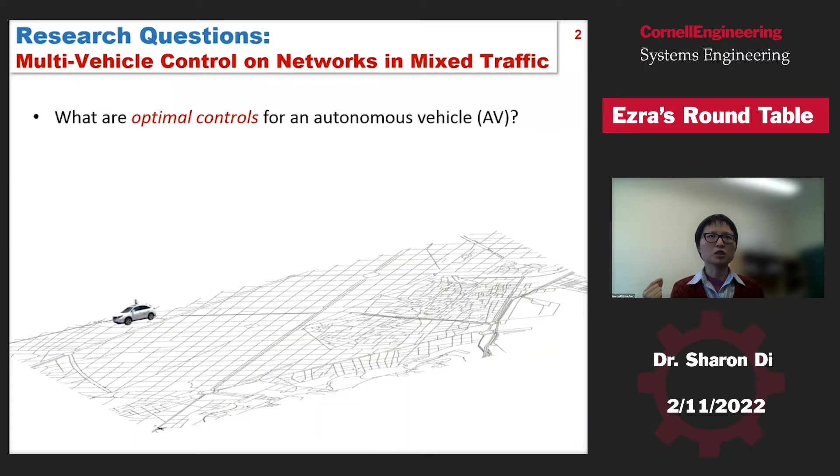What we really want to consider first is what's the optimal control problem we should formulate for the autonomous vehicles. When they are running on a road network, they first need to determine their speed choice when they move along a road link or segment. But at the intersection or junction point, they also need to determine which route they want to take, or what's their turning ratio.

However, if there are a lot more autonomous vehicles on the roads and they interact with each other, then not only does one optimize its own objective function while others are also doing so simultaneously, this forms a game. So how do we solve this game, and derive some equilibrium-based and optimal control policies?

The last question we are interested in answering is, how do we infer human behavior when they interact with the autonomous vehicles? In this talk, I will introduce how we leverage game theory, in particular Mean Field Game and control, and also machine learning, in particular physics-informed deep learning, to solve this problem.

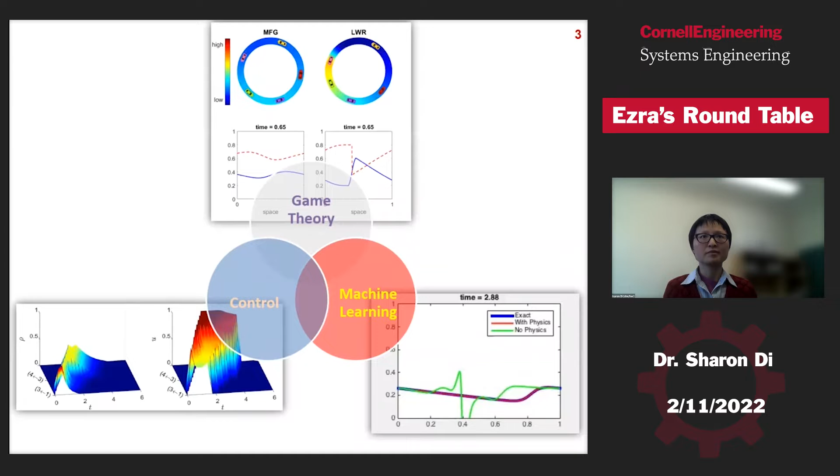Before I delve into methodology, let me show you a video clip, basically recorded by a driver inside his car. This is a Waymo car trying to merge onto the highway main line. You can see its left turning blinker is on, and all the other human drivers in the neighborhood of this car were able to successfully merge onto the mainline. However, this car failed to do so and had to get off the highway at the next off-ramp.

So from the human behavior perspective, this doesn't make any sense. I think there are many reasons this happened, and one reason is probably that nowadays autonomous vehicles are controlled using more control-based methods, or what I call a control agent.

However, people realize in both academia and industry that we really need to model them as AI agents. What do I mean by artificial intelligence here? It's that we need to treat each autonomous vehicle as a rational agent or game player. Their goal is to optimize some utility function, and then they either play a cooperative or non-cooperative game. They need to develop this capability of learning and adapting to the emerging traffic environment.

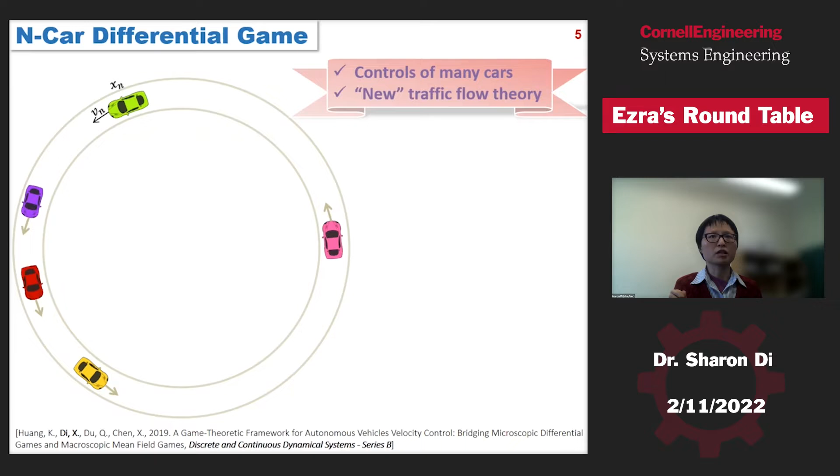Their goal, basically, when we apply this differential game and then approximate to mean field game, the methodology is scalable, which means we can use this equilibrium to control many vehicles simultaneously. We also found the connection between this game theory and what we call a new type of traffic flow theory, so I will describe how we apply this method.

We assume every car here has an objective function called J, and this J is composed of two parts. The first, Fn, we call the cost function, it's time dependent, so it can include any terms describing the car's running cost, congestion, safety, or emission. You can add whatever terms you want your car to consider while optimizing its driving policy.

And this V is the terminal cost. Basically, at the end of the driving horizon, denoted as big T, what cost do we want this car to achieve.

Our interest is a Nash equilibrium of the velocity control for car N. The definition of this equilibrium is that when other cars fix their control strategies at V minus N, this car, when it adopts this equilibrium control Vn star, will have a minimized objective.

So for the differential game, this is the setup, and I think you can basically treat it as a coupled system of optimal control. Each car is solving its own optimal control problem, everyone, but they interact with each other, so one's action may influence others. This game becomes not scalable when the number of cars grows in the system.

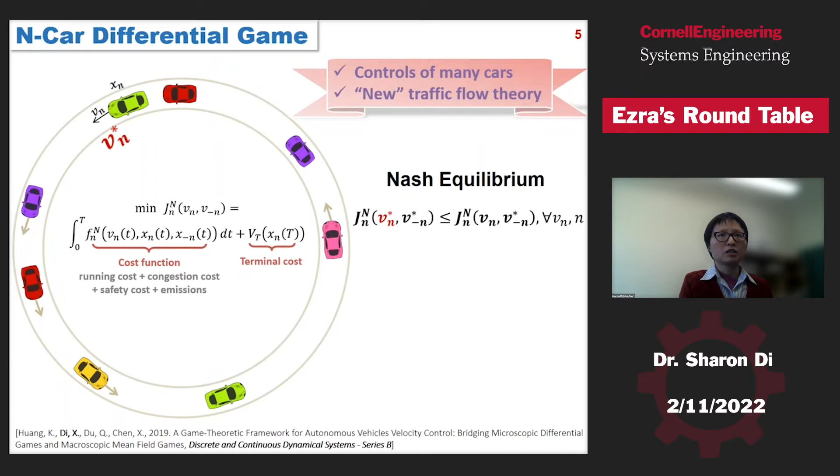So what we do is we introduce the so-called mean field game. What is a mean field game? This concept was proposed by two groups of people back in 2006 and 2007 independently, and this game aims to solve a decision-making process for multi-agent dynamic systems.

In the dynamic system, every agent plays a so-called non-cooperative Nash game. However, because the number of agents is large, this mean field approximation can be applied to go to the so-called n-player limit. When we let the number of agents go to infinity, the game moves from the differential game to mean field game.

Since its inception, this game has demonstrated its robustness in explaining social phenomena, including Mexican wave and fish schooling. The reason is because it can bridge the microscopic agent-level optimal control problem to the macroscopic mass-level dynamic system. I will skip the details about mean field game, but let me talk about how we apply this mean field approximation to the differential game we set up at the beginning.

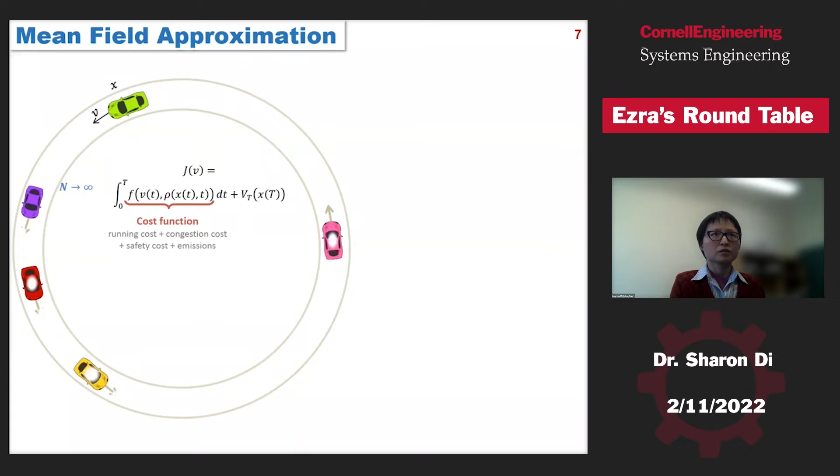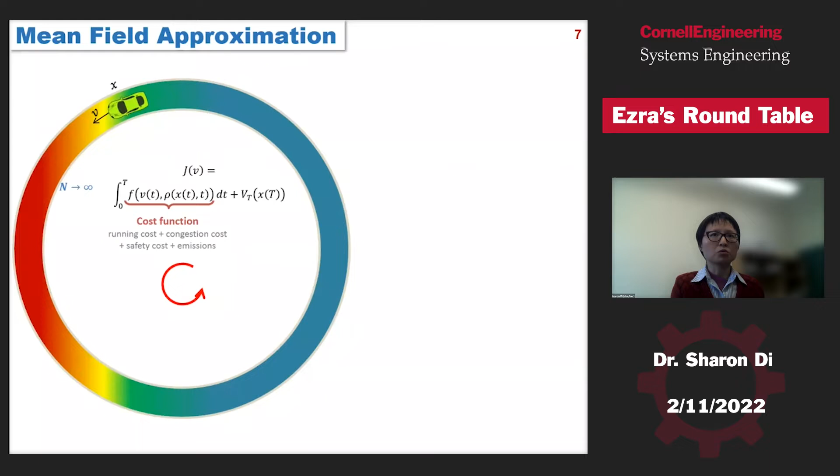Once we have this approximation, this generic car doesn't see the discrete cars in its neighborhood. Instead, it can only perceive the traffic density in its neighborhood. We use this heat map to represent the traffic density, basically the spatial distribution of cars.

And instead of solving a Nash equilibrium, now we are trying to solve the so-called mean field equilibrium. It consists of two dynamic fields: U, which we call the traffic velocity field, and rho, the traffic density field.

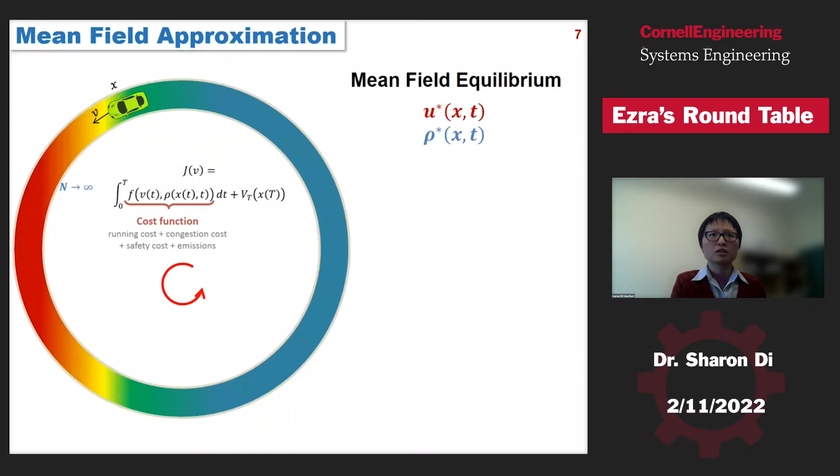How do we solve this mean field equilibrium? We use so-called forward-backward equations. Let's start from the agent dynamic.

Each car in the traffic stream tries to react to all the neighboring traffic environment and solve an individual optimal control problem. Once we apply this mean field equilibrium, this generic car solves a generic optimal control problem. V is the speed of this generic car, and J is the objective function.

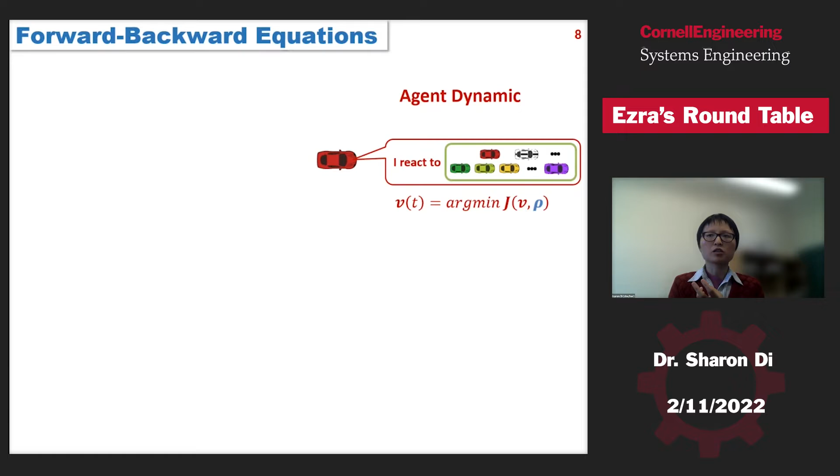When we solve this objective function, we assume rho, which is the traffic density, is known. Given rho, we can solve this optimal control problem, and then we can feed back the U, which is the velocity field, back to the so-called mass dynamic.

Mass dynamic describes how the traffic population moves. Here we use the flow conservation equation. In this flow conservation equation, we assume U is known, and we try to solve the traffic density rho. Then this goes back and forth until it converges, then an equilibrium can be obtained.

We call this agent dynamic a HJB equation solved backwards. And the mass dynamic is the FPK equation, solved forward.

If I write out what this HJB equation looks like, it consists of two equations. V is the optimal cost, we need to solve it, and rho is the traffic density.

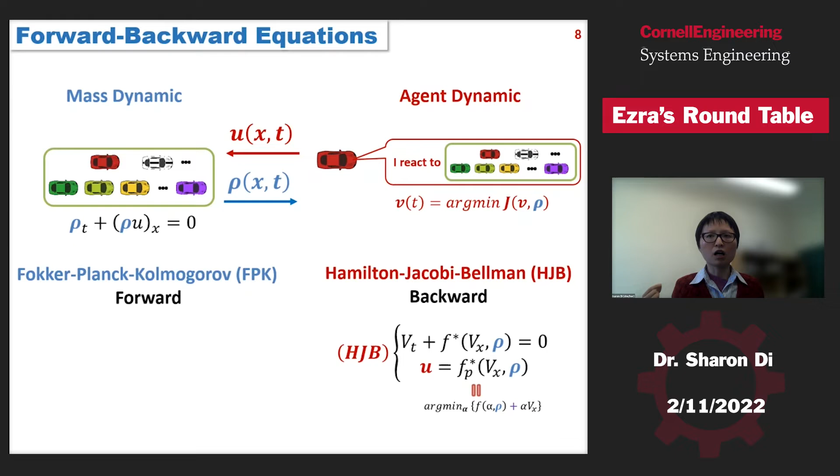F is a common mathematical transformation. I indicate what it's like here. And the FPK equation is just the flow conservation.

Here I want to mention that the mean field game we focus on the deterministic system. Usually, when this game is applied to other fields, the FPK equation also has those viscosity terms and also stochasticity terms.

The reason we assume it's constant, which means the right-hand side is 0, is because traffic cannot appear or disappear all of a sudden. So we assume flow is exactly conserved.

How do we solve this system? There are three categories of methods. The first is variational form, but to use this we need to assume this game is a potential game, so the cost function we focus on can be decomposed. Basically, the traffic density rho and the traffic velocity u can be separated. But in our case, it's not separable, and I will explain why in the next slide.

Then fixed point iteration, it's quite straightforward. If we can solve the forward and backward equations iteratively, eventually it can converge. But we found out that in our case, when t is very large, basically the planning horizon is long enough, this method also failed to converge.

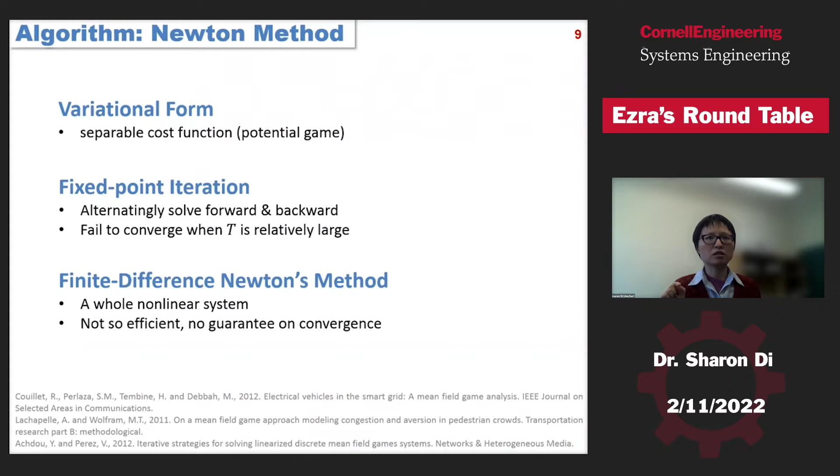So we adopt the third method, the finite difference Newton's method. Basically, we put the forward and backward equations into one big system, discretize it in time and space, and solve the big equation.

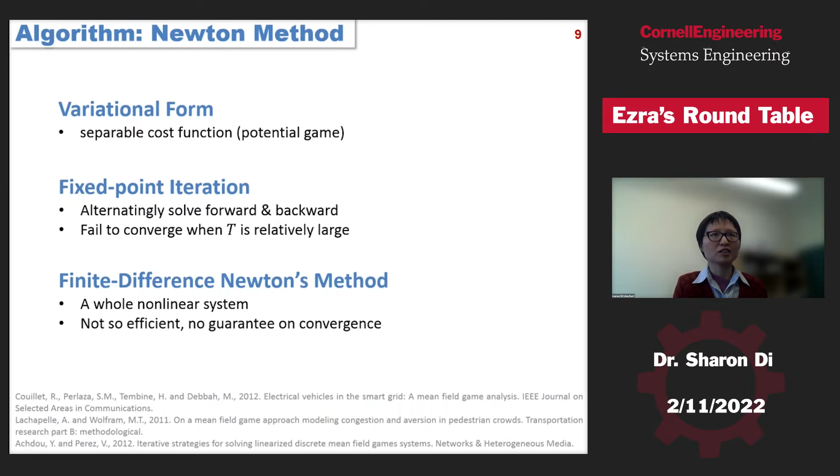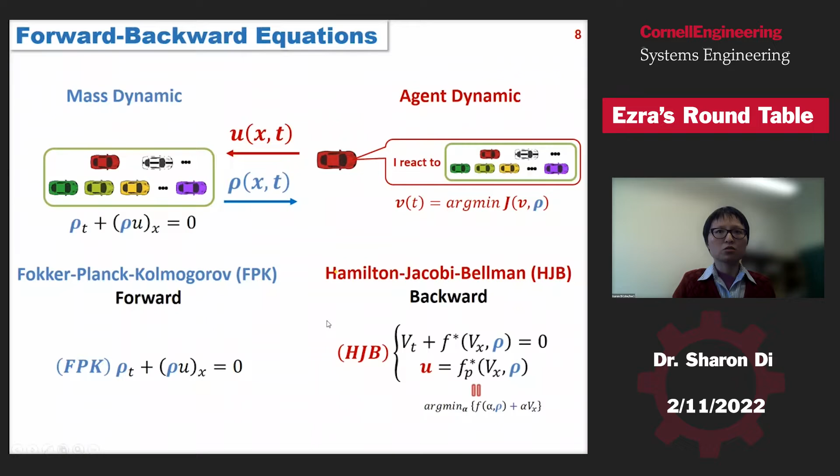Thank you for the question. I try to introduce some traffic background, so if you have questions about what the terms mean in the traffic background, feel free to jump in. I can elaborate more.

Now we demonstrate how the Mean Field game works on a ring road, and now we want to look at a transportation network. This is a subnetwork extracted from a large network. Assume this car moves from node K to node I. While driving along this road segment, its speed is controlled by the Mean Field game we introduced in the previous part. So we solve the Mean Field game and get this equilibrium, which is a velocity field U and density field rho, that can propel the car to move from K to I.

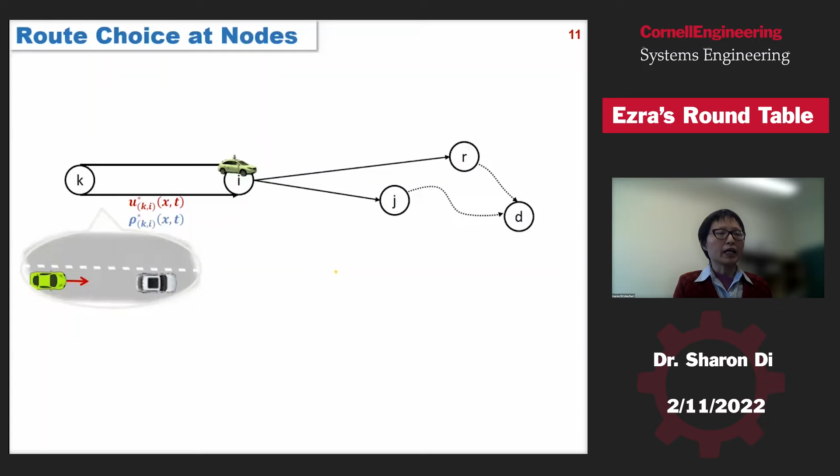However, the next question is, how does this car make a route choice at the intermediate node I? Now we introduce some additional decision variables. Assume at node I that this car can only select either the IR link or the IJ link.

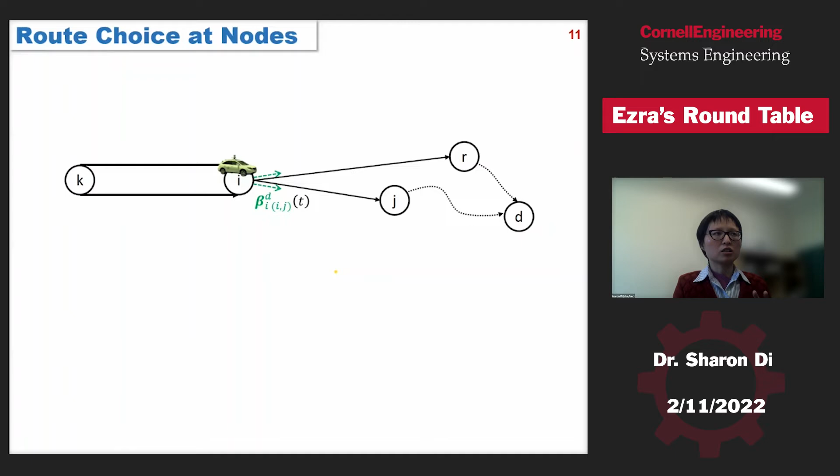We introduce so-called beta, the decision this car makes at node I, given its destination is D. If it's associated with link IJ, we call it the mixed strategy, which means its value can only be between 0 and 1, a probability. If this is greater than 0, it means this car will likely select the link IJ.

Based on this condition, we can formulate the optimality condition, which means the left-hand side is the optimal cost from node I to D, and should be equal to the sum of these two terms. I will demonstrate what these two terms mean in a few seconds. If this beta decision variable is 0, it means the left-hand side is smaller than the right-hand side, so we know that IJ is not the optimal link along the optimal path from node I to D.

So what is pi_ID? Pi_ID is the optimal cost, or we call it the node potential, from node I to the destination D. Similarly, pi_JD is the optimal path cost from J to D. And tau here is the travel time, the time lag for when the car moves from I to J.

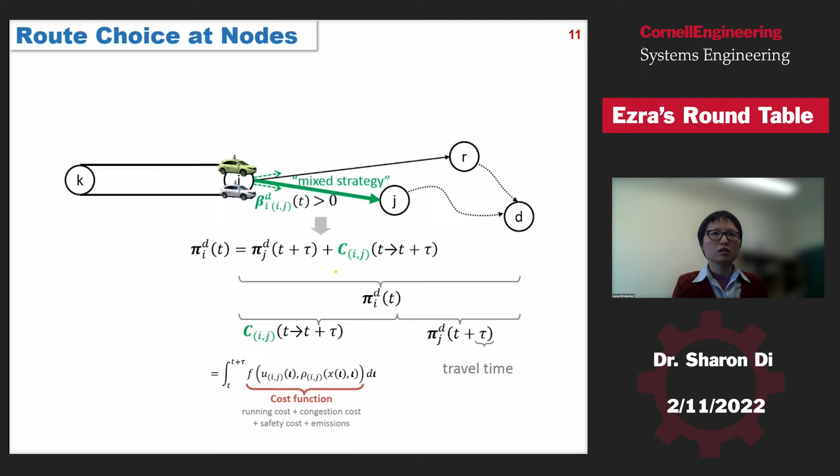If there's a queue at node I, meaning when the green car reaches node I but there's already a car in front of it, then this car has to wait. We have to introduce another notation, the queue, Q, we call the queue size. Here I assume the queue is modeled as a point queue, or a vertical queue, meaning it doesn't occupy any spatial space.

If there's a queue, we have to solve a basic differential equation where the rate of queue dissipation is equal to the inflow minus the capacity of that queue. For a point queue, we can assume capacity as a constant value.

Once we introduce this queue, we also have to calculate queue delay when we indicate pi_JD, the optimal cost from J to D, assuming a linear relationship, Q divided by the capacity. Also for the cost when this car traverses link IJ, we have to add a Q cost, and this cost is a monotonic relationship or function of the Q size - you can use a linear or nonlinear function.

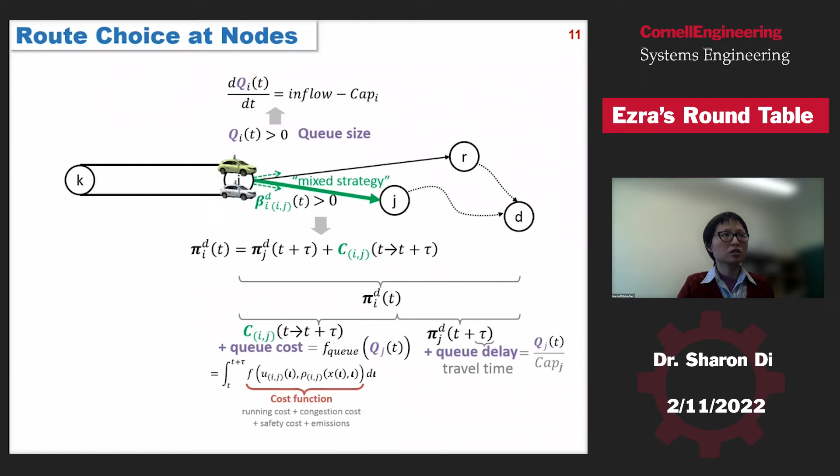So I will skip how this big system looks like. Basically, we introduce the new equation. Here, one is the route choice, variational inequality or complementarity, and also the Q equation, differential equation. I just would like to present how

what this under this big framework, how this mean field game works in a small network. So we use this as the demonstration network, and we assume the origin node is 1 and 2, and the flow from originating from 1 to 2 will end at node 4. 4 is the destination node. And the cost function we will specify is similar.

It's the here we will consider running cost and the Q cost. The running cost has 3 terms. The first we call the kinetic energy. So U is the traffic velocity. U square is usually represents the energy or the kinetic energy the car consumes.

And rho divided by rho J, jam density, is the safety consideration. And this constant in the cost term, because it's integral over time, so this constant actually represents what's the weight of the traffic speed or travel time plays a role in this cost function. And the Q cost we define is basically a linear function with respect to Q delay.

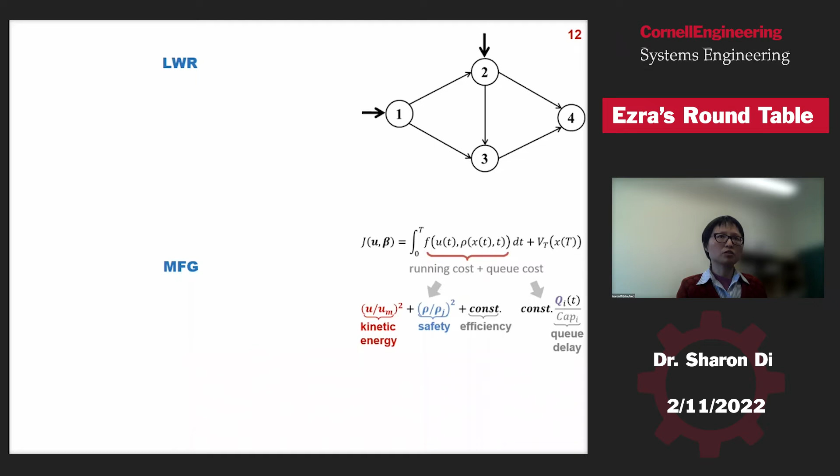I also want to demonstrate under the LWR and the mean field game control, how this traffic dynamics looks, how different it looks like. And I will use 2 figures. So the left-hand side figure, the z-axis is the traffic density rho. The right-hand side figure is the traffic velocity. And the x-axis is the time, and the y-axis basically demonstrates how the flow moves along this path 1, 3, 4.

Okay, this is how under LWR control, how this flow evolves in this small network.

And this is how mean field game works. So I'd like to draw your attention to this peak. So in the traffic density, this peak represents when there's a high density in this area. Actually, this is when at around node 3, when the traffic stream coming from node 2 meets the traffic stream coming from node 1, and there's a bump because they almost reach node 3 at the same time. So that's why it leads to a dip in the traffic velocity.

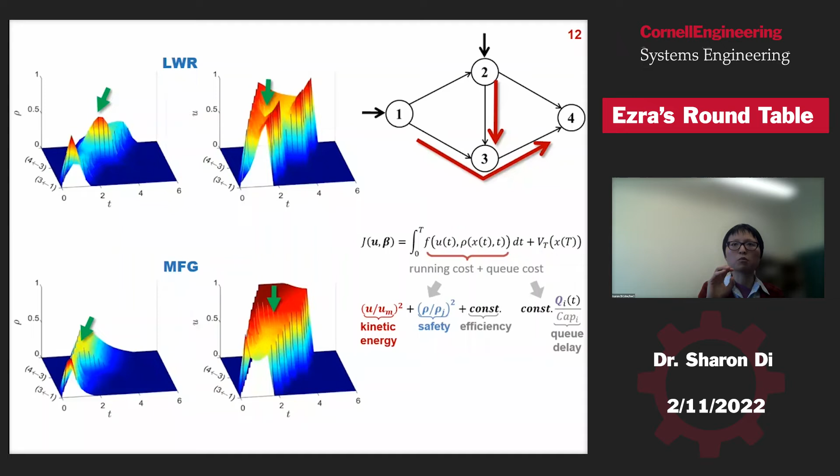But in contrast, you will see if we control it using mean field game, this doesn't exist. So the traffic flow is quite smoothed out. The reason is, again, like what Samisa asked: because the traffic stream coming from node 2 can somehow anticipate how traffic density evolves. And then they found out, okay, there could be some potential conflict in the near future. So that's why they decide to slow down a little bit and let the traffic from node 1 cross node 3 first. And eventually the whole traffic flow is smoothed out.

Sharon, just another quick follow-up on this: why couldn't the LWR also do this if it knew the boundary conditions and was trying to do some finite horizon optimal control? It will see, it knows the dynamics, right? So we can, let's say you discretize this as a CTM and did some finite horizon optimal control, why wouldn't the LWR approach also be able to anticipate what's going to happen and throttle accordingly? So for LWR, the boundary condition we only provide is the one here, right, at node 4.

Basically, they need... No, I meant if you knew the demand. Let's say 4 is an infinite sink, and then you knew what was coming from 1 and 2. You know the dynamics, right? The LWR will tell you how many vehicles are going to be at 3 at a certain time. So I'm not sure what kind of LWR optimization you're doing, but you could consider an LWR optimizer that is using the LWR again as the dynamics equations.

Yeah, so the reason is because for LWR, you don't directly control speed, right? So once you know the density along this link, speed is fixed. So there's no actual optimal control of the speed.

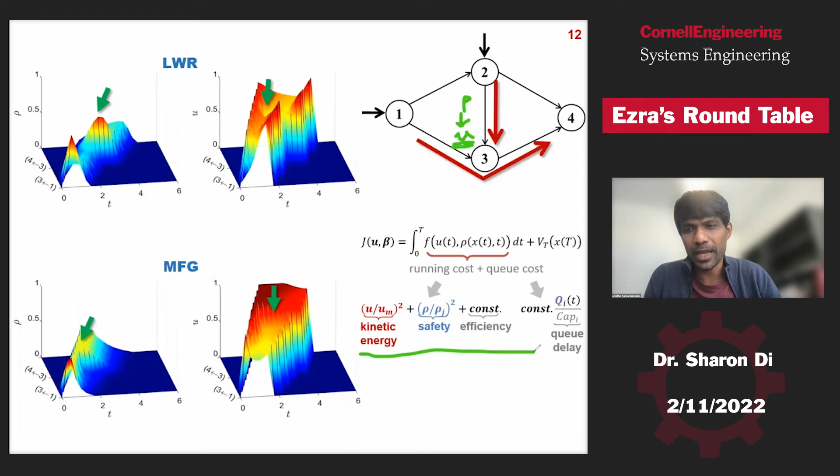But here, the objective function, we impose it to individual cars, and then let them play non-cooperatively. I think the key thing is that you can do it with LWR, but you can do it in maybe a nicer way with this approach. But you can also do it with LWR if you did the optimal control, I guess.

Okay, thanks. Another thing is, no matter LWR or other traffic models, on a network we call it the dynamic traffic assignment, or DTA model. They always use travel time as the objective function. But here, because we can introduce this term I call efficiency, it controls how important this travel time is for the car to reach its destination.

But we can also introduce some other terms. So that's why for this system, the cars are not necessarily trying to reach the destination as fast as possible, but also they try to balance out or trade off kinetic energy and safety factors.

Okay, so any other questions?

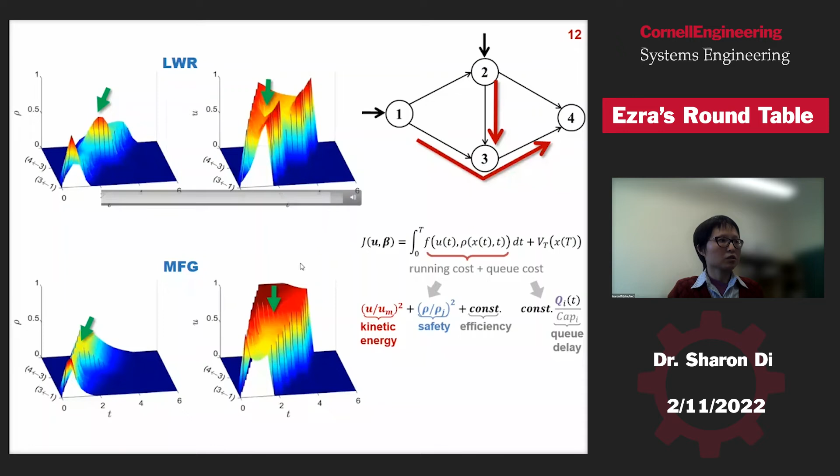Let me move on to the next part. Here we introduce how this Mean Field Game can be leveraged to manage a large fleet of autonomous vehicles on road networks. In my research, we also apply control concepts to design this Mean Field Game, so that the traffic flow can achieve the certain goal we want. But because time is limited, I will skip this part.

I will directly move to how we use the machine learning approach to infer human behavior. First, let me introduce how we model this mixed traffic coupled with autonomous vehicles and human drivers. Autonomous vehicles, we assume they are driven under this Mean Field Game. Human drivers, we assume they follow the so-called ARZ model. I will introduce what ARZ model is.

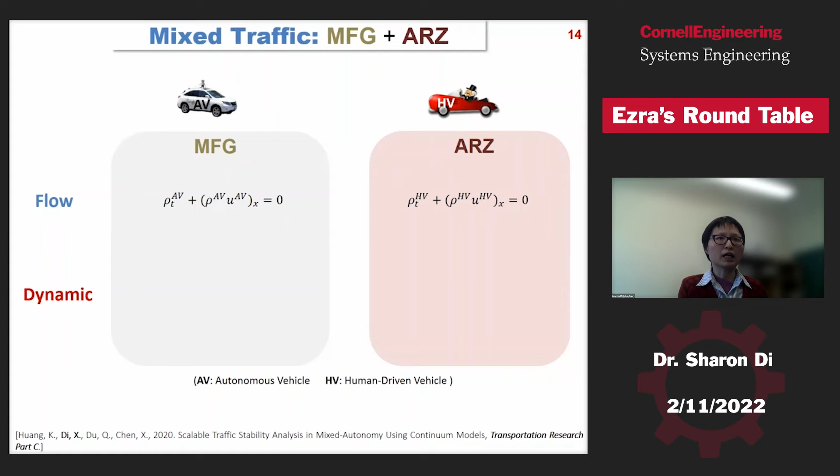Each system consists of two flow equations. Each type of car has to satisfy this flow conservation for their specific vehicle class type. Then the traffic density of AV and HV, the sum is the total traffic density. And for Mean Field Game, they have this HJB equation we described before.

And then for the ARZ model, this is a momentum equation. We call ARZ also a second order traffic flow model because this term can be treated as acceleration. So we not only control the traffic density and speed, but also acceleration.

So the reason we use the ARZ model instead of the LWR model I described before in the first part is because the ARZ model itself can generate stop-and-go behavior. So it can be non-stable. That's why we want to focus on the second order model to describe human behavior.

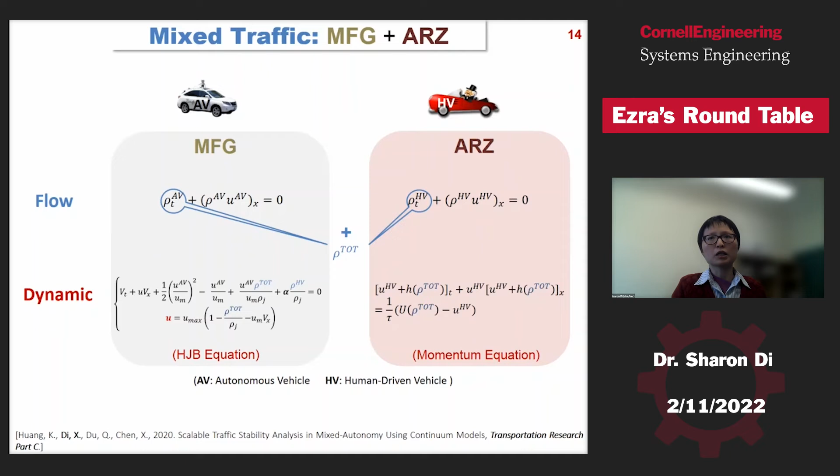So because we use ARZ to approximate human driver behavior, it's essentially also a PDE system. You can calibrate this system using traditional methods. But here I want to introduce how we use physics-informed deep learning to calibrate this human driving data.

So now let me give you some brief introduction about how this machine learning model may fail and why we need a physics-informed method. There are two parts: one is the machine learning approach, one is the domain knowledge that has been developed in the past decades in transportation. Machine learning has the advantage of discovering the mechanism directly from the data. However, it requires a huge amount of training data to discover the pattern.

On the other hand, the domain knowledge or physics-based model can provide some physical consistency to regulate the machine learning training process.

If we use this diagram to demonstrate the relationship between these two fields, we can see that the x-axis is the amount of data needed to train the model, from low to high, and the y-axis is the amount of scientific theory needed. So physics-based models require a lot of scientific hypotheses but very small data to calibrate that physics. On the other hand, machine learning models rely on a large amount of data with very minimum prior assumption of scientific knowledge.

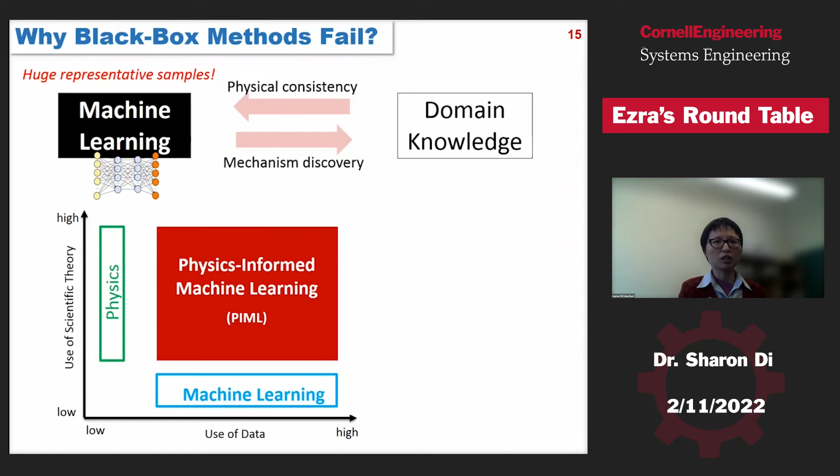So recently, this physics-informed machine learning, or PIML as I'll call it from now on, has been booming because it can leverage the benefits of each domain.

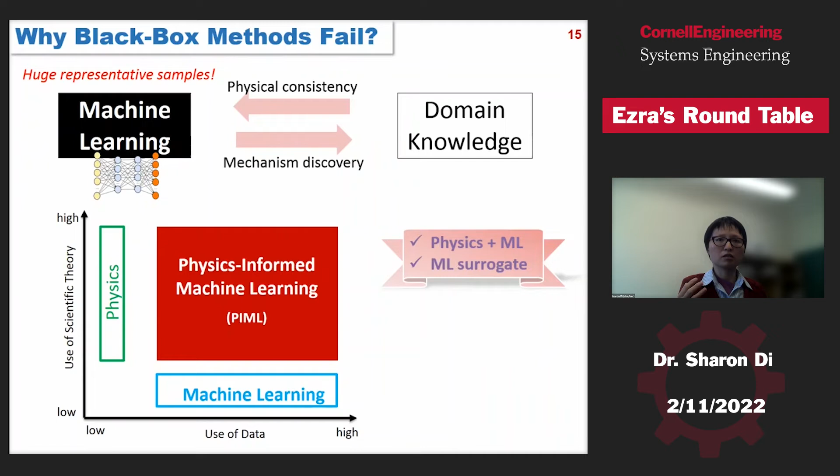For this part of the work, our contribution is applying this physics-informed framework to traffic state estimation using real world human driving data. We also develop a machine learning surrogate model to estimate some traffic behavior that is inherent in the data.

So let me first formulate how this problem is laid out. Physics-informed deep learning was initially proposed to solve PDE equations.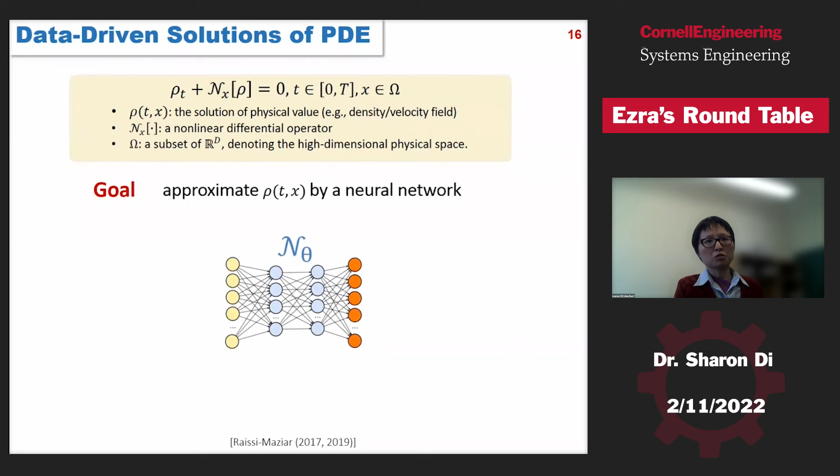Assume this is the neural network parameterized by theta. If we input one (T,x) pair, we end up with one value of rho. If this neural network is equivalent to the PDE solution, we introduce a so-called residual - this residual should be equal to 0, basically the left-hand side of the PDE function. So now the problem is boiled down to how we can train a neural network that will lead to a residual being equal to 0.

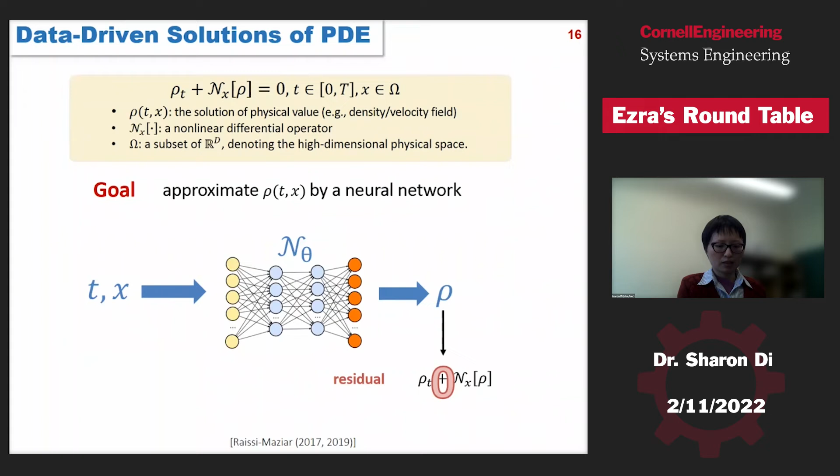So let me show you the training process of this framework. Assume this is the neural network we try to train - we call it the physics-informed neural network.

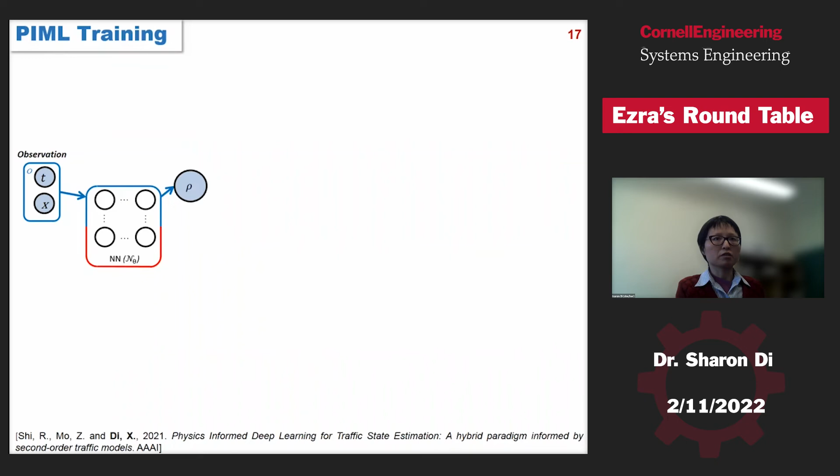We have observation data, or labeled data - we can observe at some time point T and some location X, and we know its measured traffic density. We can also input this T, x pair and generate a rho from the neural network, so that we can compare the observed traffic density with the generated value from the neural network and calculate their discrepancy.

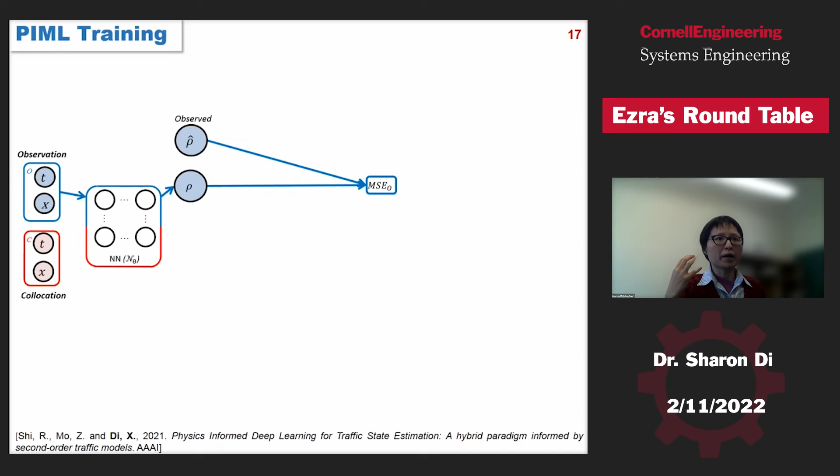Other than the observation data, we have collocation data - we call it unlabeled data. We just randomly select some T, x pairs; we don't know the actual measured rho value at this pair, but the neural network can generate a value. This value will be fed into a traffic flow model, and lambda represents the parameter of that physics-based model.

Then we can calculate the residual defined in the previous slide, and this residual has to be as close to 0 as possible - meaning if this process is generated from the PDE solution, then rho should be as close to the value computed from this traffic flow model as possible. Then we can define a loss function using the weighted sum of these two terms and try to minimize it. If it's not minimized, we go back to update the parameters in the neural network. We also need to jointly estimate the parameters that appear in the traffic flow model.

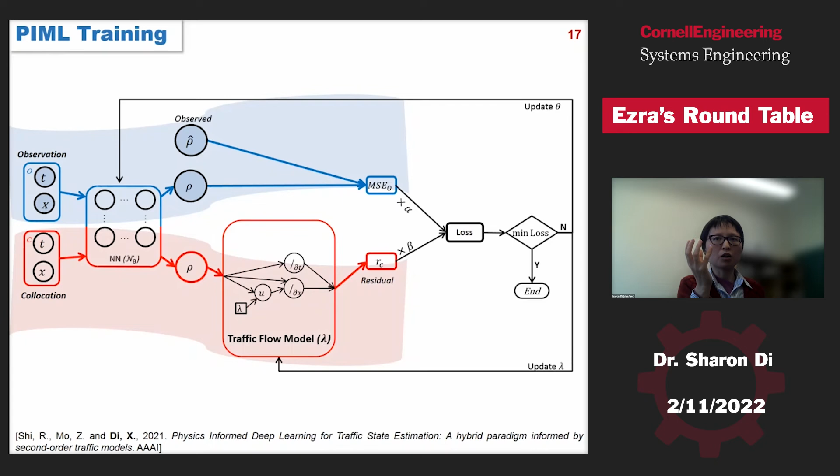So this is the whole process of training a physics-informed machine learning model. The upper branch represents the data-driven approach, and the lower branch is the physics-informed path, because the physics will regularize how this residual value becomes eventually.

Here we customize it a little bit - we introduce a so-called fundamental diagram learner. What we changed is here: instead of jointly estimating the parameter lambda in the original physics model, we replace it with another small neural network, which we call the fundamental diagram learner.

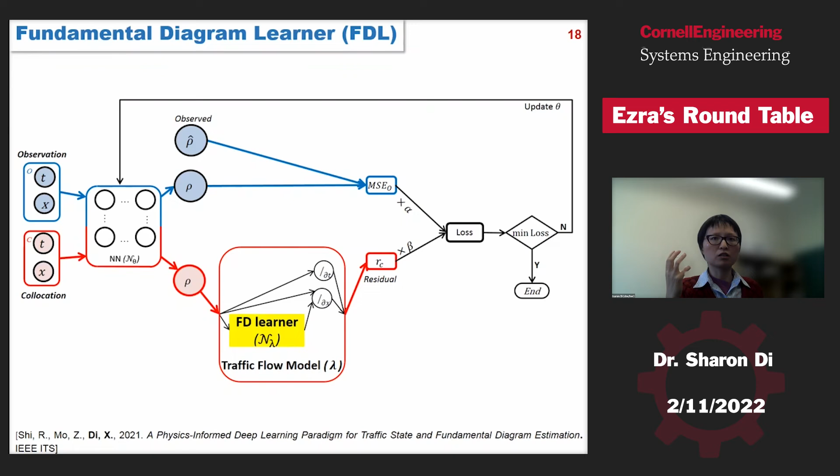Then this becomes a machine learning surrogate model. To train this, when we update lambda, it is not the coefficient in the original physics model anymore - it's the hyperparameter of that FDL neural network. After we update this, we can also get another physics-informed neural network that can be used to generate the data on the test set.

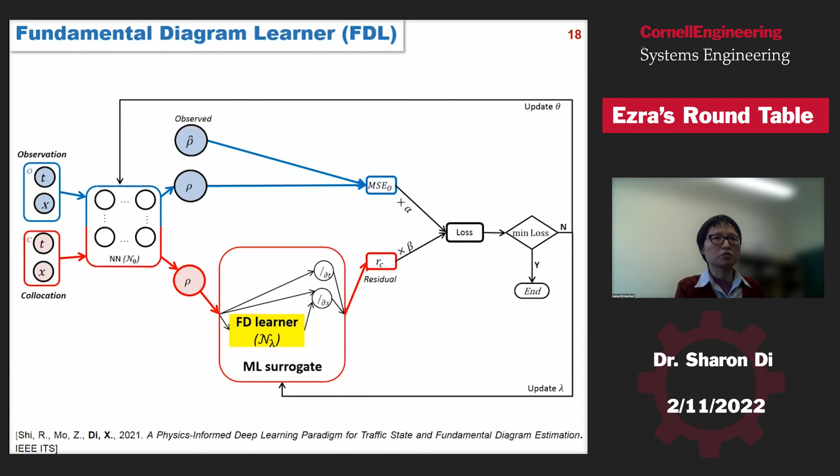Okay, so now I will basically present the results using this approach for a real-world data set, NGSIM. NGSIM is a widely used traffic data set.

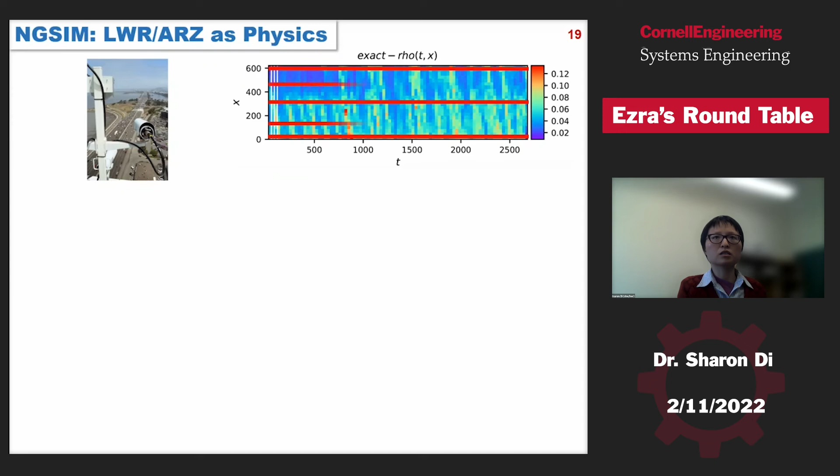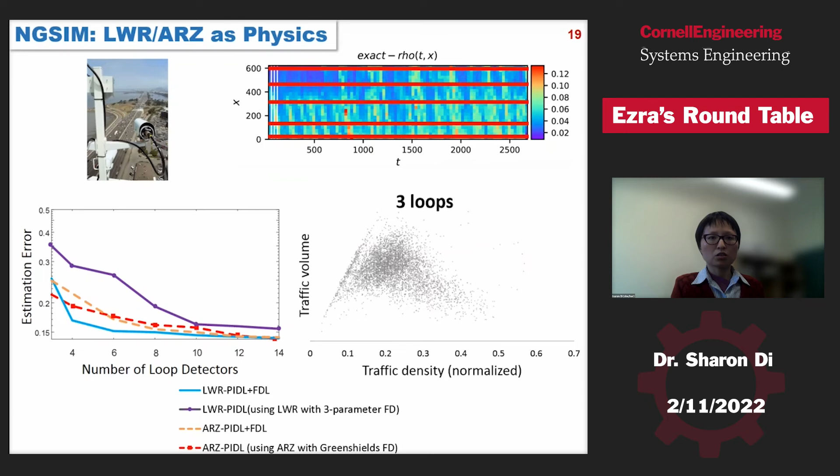Let me present the estimation error across several models we used. The models we compared include 4 models. The first 2 use the same physics, which is the first order traffic flow model, LWR. The last 2 use the second order ARZ model as the physics. And within each group, we also either use the fundamental diagram learner or use a pre-calibrated fundamental diagram.

Before I introduce the right-hand side figure, let's look at the left-hand side, how this model prediction error changes when we increase the number of sensors. We can see as long as we place more and more sensors, the estimation error decreases. That is quite obvious.

But I want to highlight that the orange line and the blue line represent the models that use the fundamental diagram learner. So we don't directly estimate or calibrate the parameter in the physics. Instead, we introduce a neural network to learn that fundamental diagram mapping, which is the mapping from the traffic density to velocity. On the right-hand side, we assume there are only 3 loop detectors given.

So what's the fundamental diagram shape we estimate from that neural network? The blue one is the LWR model with the learner, and the orange one is the ARZ model with the fundamental diagram learner.

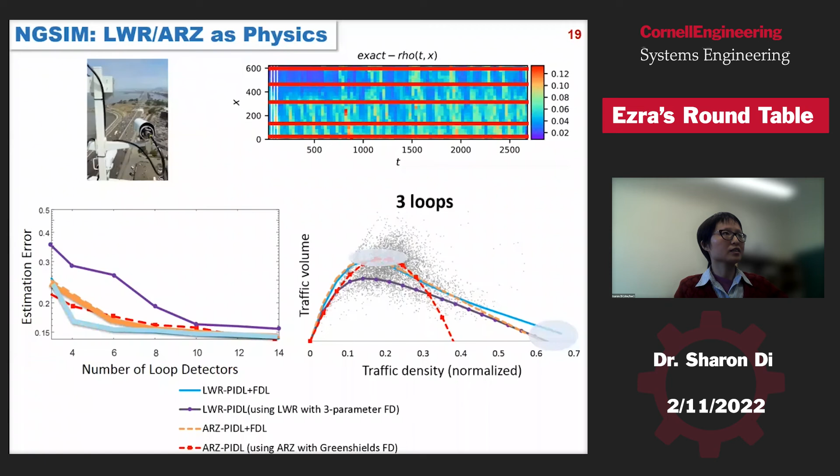Just quickly, let me talk about some future research directions. I introduced how we use game theory, control, and machine learning to solve problems for emerging transportation technology. In the future, I really want to close the loop between these different methods. For example, ongoing work we are working on right now is to see how game theory and machine learning can be combined.

Basically, in the Mean Field Game, when we solve the equilibrium, we still assume every agent knows the environment and can predict how the environment dynamics evolve. However, if they lack that knowledge or only have partial knowledge, we need to assume these agents have to first learn what the environment is like, including what reward they may get given they execute one action. So learning in game, or machine learning based game, is also an active area.

We are working on the macro game, so how we can use reinforcement learning to solve an equilibrium in the game. Another loop we try to close is between control and game theory, so how we can introduce high-level control that will guide the equilibrium of the game towards the social optimal and achieve the goal of system performance instead of satisfying individual interests.

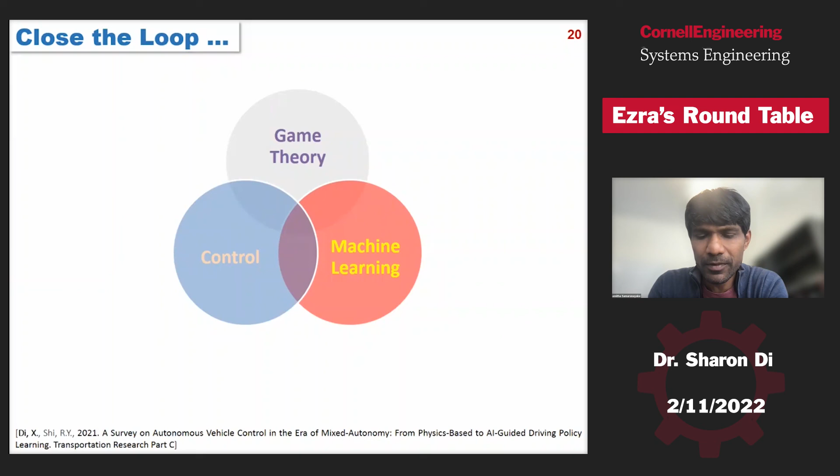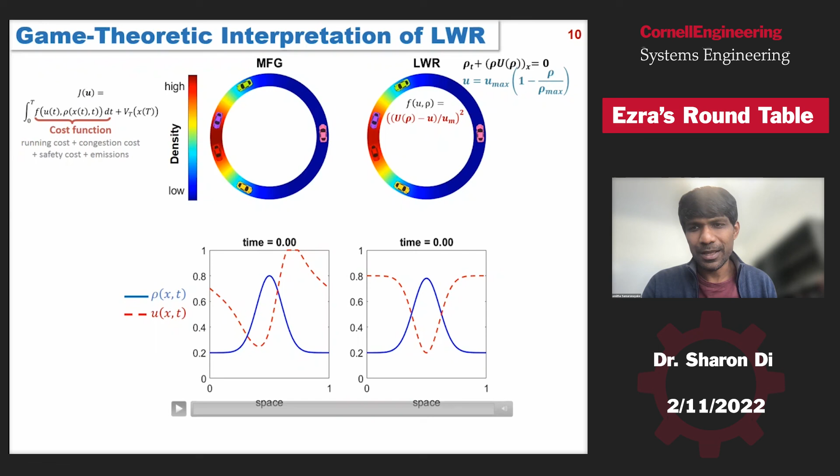I guess in the meantime, maybe I'll ask another high-level question. Compared to using more standard LWR type models with optimal control, are you comparing? Because right now in all your comparisons, you're not comparing these methods against people doing control within the LWR system, right? So how would they compare, and in the other extreme, how would this compare to methods that are completely reinforcement learning driven, like maybe Cathy Wu's work? So you have the best people doing purely control on LWR type models, people doing completely data driven things, and now this Mean Field Games type approach. What are the pros and cons for these methods? Is that something you've thought about, or is it future work?

Yeah, I think that's a good point. This field, especially for mixed traffic, attracts more and more researchers in the past few years, so it's kind of become a saturated field. Different people use different angles to model this.

This game approach, we assume each agent is a rational game player, and they have their own objective function they try to achieve, so here we assume they play a non-cooperative game. But for most control methods introduced in this field, they assume centralized control, and may develop some distributed control method. But basically there's a traffic planner, city planner, or AV manufacturer who has a common goal, and they assume these cars are coordinated and will follow whatever control policy the high-level planner tries to impose. So I think this is the major difference here.

And you mentioned Cathy Wu's work — basically theirs uses reinforcement learning, and they also assume it's coordinated, so every car coordinates with each other and they optimize a common objective function.

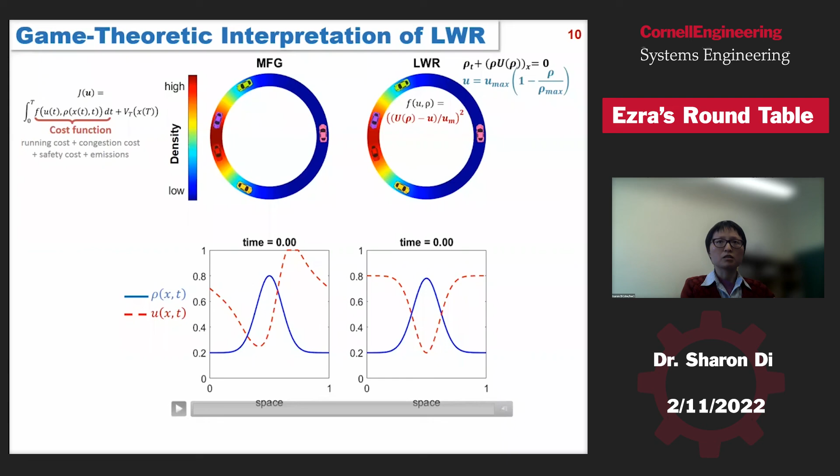Our argument for why we think it's a non-cooperative game is that if we look from a network perspective — let me quickly switch to this slide — when a car tries to move in a network from point A to B, their goal is to deliver the passenger to the destination as fast as possible. If they don't care about the social optimal, because if they follow social optimal then some cars' travel times are sacrificed, that's why as an individual agent they don't have the motivation to coordinate or follow a central planner's view, unless you impose some external effect, like congestion pricing, toll, or some other charge or cost imposed on the environment. Then they still follow a non-cooperative mechanism, but the equilibrium can be guided towards that social optimum. So that's our argument.

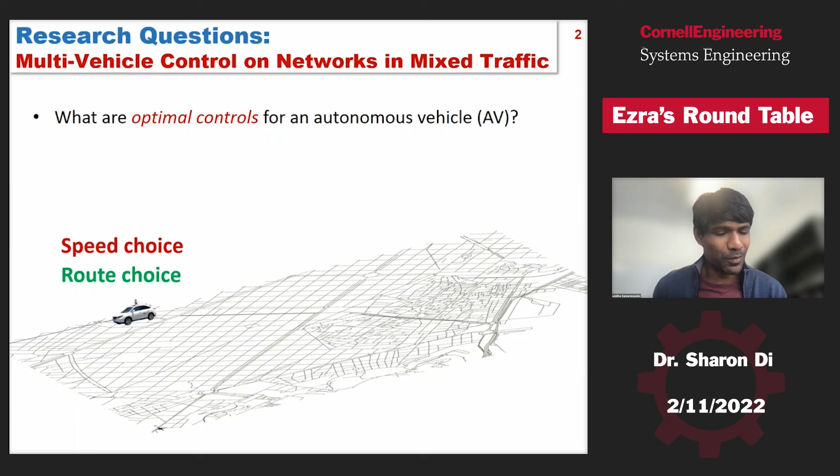Great, thanks, that makes sense. I of course have more questions, but let's see whether anyone else has questions, and we can also talk offline. We're also at 1:25 now. So feel free to ask — I don't know whether it's too transportation oriented, but if I didn't explain some concept clearly, also feel free to jump in.